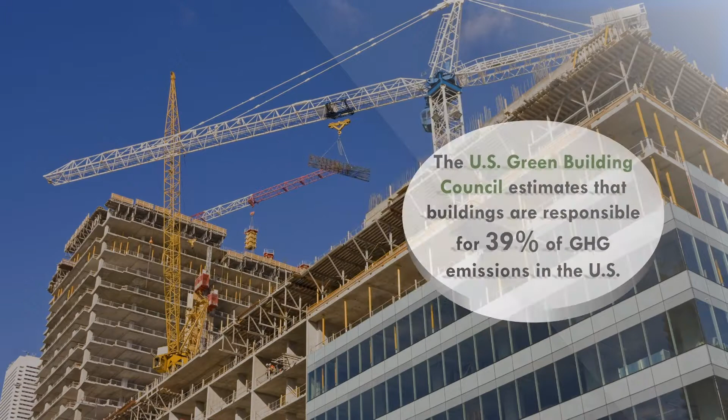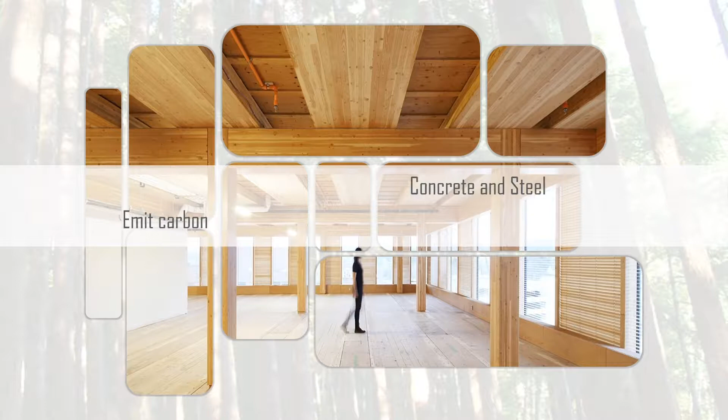Increasingly, wood-based building products are being promoted as green alternatives to concrete and steel. And the argument is that while concrete or steel create carbon emissions, wood products actually sequester atmospheric carbon. There's been quite an effort to market the newer engineered wood products on this basis. But what I'm going to highlight today is that the full carbon impacts of wood-based building products are not fully accounted for in most studies and in the industry literature promoting these products.

I'm going to start by laying out a few key messages for you here. First, it's a nearly universal assumption that timber is always harvested from a sustainably managed forest. But in reality, for a number of reasons, this is not always the case. At the point of harvest, when timber is removed from the forest, a significant amount of the already stored carbon is lost or emitted into the atmosphere. During the manufacturing process, again, there are significant emissions and losses of carbon. A lot of these emissions are not fully accounted for.

Then, in the built environment itself, this issue of material selection is actually just the tip of the iceberg. Greening the built environment requires a much broader lens than material substitution. The way the issue is often framed, that of wood versus concrete or concrete versus steel, is a bit of a misnomer, because in the final analysis it doesn't make a big impact on lifetime emissions. What does have a big impact are things like design, location, and longevity. The embodied carbon in these materials is only a small part of a much bigger picture.

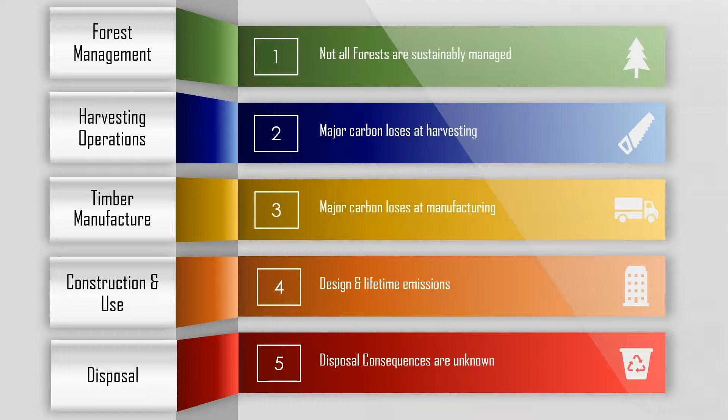And finally, the carbon emissions associated with the disposal and landfilling of wood products are very poorly understood. We don't have a good handle on what happens to the carbon in wood products when they end up in municipal landfills. There's a great deal of speculation in what is really a crucial stage for carbon accounting purposes.

I'm going to start by briefly covering the concept of carbon neutrality. Emissions from burning biomass or biofuels are called biogenic emissions. Now, carbon neutrality is the principle that when biomass is burned for energy, or the carbon from biomass is released into the atmosphere in some other way, these emissions are not counted towards the final carbon footprint of a product or process. The rationale behind this idea is that these emissions represent only the carbon that was initially absorbed by plants or trees while they were growing, and that these emissions will be fully reabsorbed by new growth later on. So this forms a hypothesis, the idea that biogenic emissions have a neutral climate impact.

But currently, biogenic emissions are 100% exempt from final emissions figures, for instance on environmental product declarations. And what this means is that regardless of how many emissions a product or process is responsible for, as long as they're biogenic in origin, they aren't a part of the official carbon footprint of the product. On paper, they don't exist. And this accounting standard gives wood products manufacturers an advantage in carbon accounting because a large portion of the emissions associated with the production of wood products are biogenic.

So carbon neutrality is in fact an accounting rule. It does not describe real-world emissions. Exempting biogenic emissions from the carbon footprint of a product on your balance sheet doesn't mean they don't exist. A carbon molecule from a biogenic source is identical to a carbon molecule from a fossil fuel source, and they have identical climate impacts.

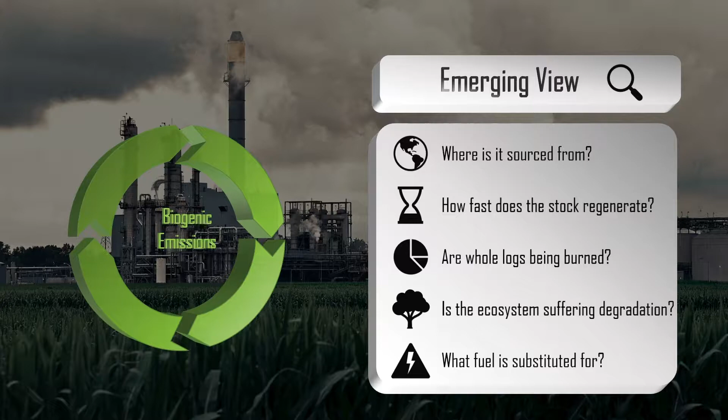This accounting framework also incentivizes the logging of forest land rather than the conservation of forest land, and this can be counterproductive. For instance, following the principle of carbon neutral accounting, there's no difference between leaving a healthy standing forest that sequesters a vast amount of carbon to mature or clear-cutting that forest and burning the wood for energy. On paper, these have identical carbon consequences, zero net emissions.

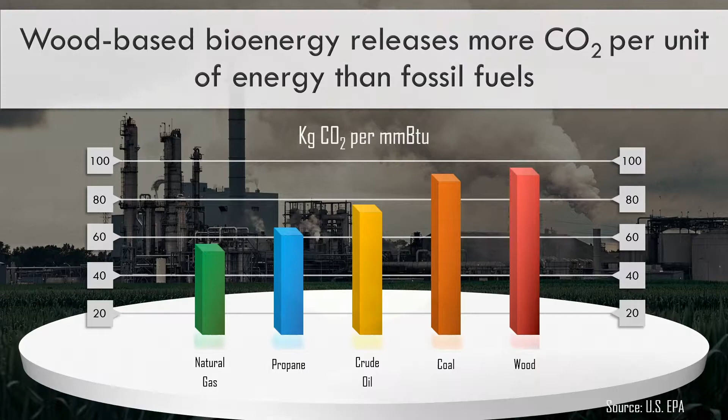Now, another concern that researchers have with the concept of carbon neutrality is that wood-based biofuels are just not very efficient. While there are differences between types of wood-based fuel or type of coal, for instance, in most cases, per unit of energy produced, burning wood or wood pellets actually emits more greenhouse gas emissions than any source of conventional fossil fuels. So there's a growing alarm that declaring all wood-based bioenergy to be carbon neutral will actually increase emissions in the air while decreasing them only on paper, because you need to burn a lot more wood to produce a small amount of energy.

Now I'm going to break down the life cycle of wood-based building products into 5 distinct stages. The first one is forest management. Second is the point of harvest or logging operations. The third is timber manufacture, where harvested roundwood is converted to various forest-based products. And the fourth is the construction and use phase. This is where we're going to discuss the role of wood in the built environment itself. And finally, disposal, or end of life.

So our story is going to begin in the woods. Forests are some of the Earth's most valuable carbon sinks. They're sometimes described as the lungs of our planet. Now, it's almost always assumed that lumber is being harvested from a sustainably managed forest. But unfortunately, from a carbon management perspective, not all forests are sustainably managed. In fact, what constitutes a sustainably managed forest is subject to much debate.

The old-growth forests of the Pacific Northwest are some of the most productive carbon sinks anywhere on the planet. They can be thought of as vast reserves of carbon capital. And once this carbon is emitted or spent, it's gone. We typically think about wood as a renewable resource because, of course, trees grow back, but these old-growth forests are not a renewable resource by any definition. If you want to renew the carbon stock of a harvested 200-year-old tree, you need to wait 200 years.

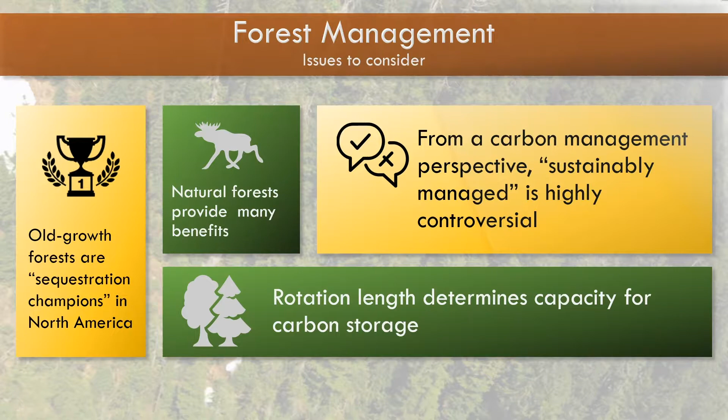Now, one of the premises of sequestering carbon in wood-based building products is that from a climate perspective, mature trees are less valuable than younger trees. It's argued that they don't grow as fast or absorb carbon at as high a rate, but there's just not good evidence that this viewpoint is viable. Although the rate of growth will decline after a certain age, the absolute quantity of carbon uptake often continues to increase, and this is because a smaller percent in growth in a massive tree adds a lot more biomass than a large rate of growth in a small tree. And so even very mature stands, well over 100 years old, continue to act as net sinks of carbon.

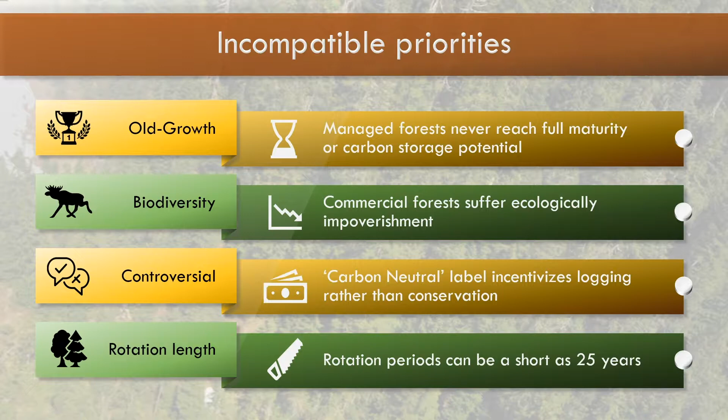In the Pacific Northwest, rotation periods, which are the years between harvests, can sometimes be as short as 25 or 30 years. And while this can be highly economical, it has minimal value from a carbon management perspective. So unfortunately, there's a disconnect between rotation lengths that are good for carbon management and rotation lengths that are economically preferred. Now we're going to talk about some of the effects of logging on forest carbon.

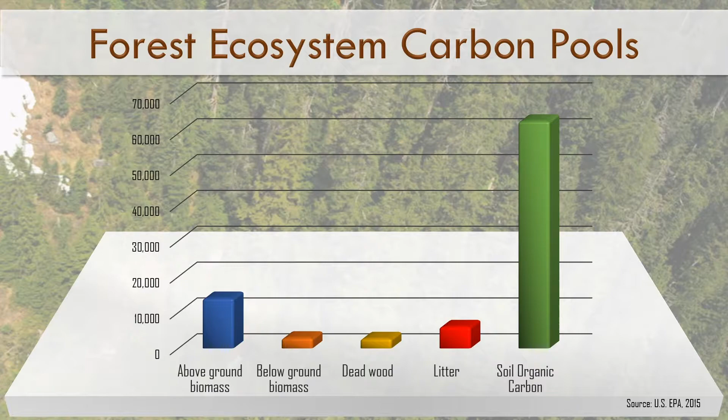Most of the studies on carbon sequestration in wood products omit the disruptive effects of logging on the soil carbon pool, which, as we saw, is the largest pool in the forest, despite current evidence that harvesting reduces the level of carbon in the soil. These are effectively emissions from the soil to the atmosphere.

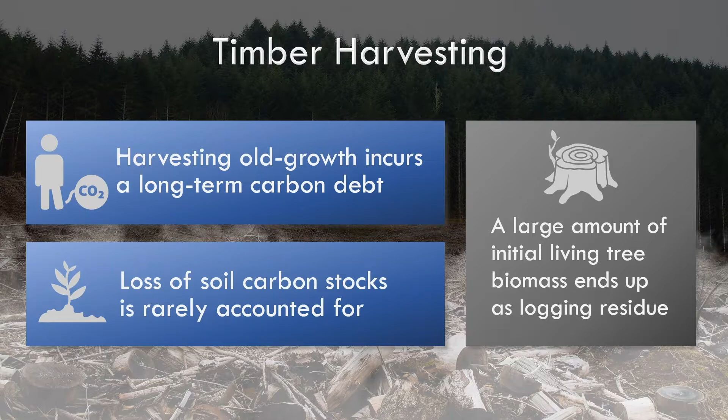During a harvest, only a portion of each tree is removed from the forest for processing. A significant portion of the biomass in the initial living tree is not merchantable. It has no economic value, and it's either left in the forest to decompose or is burned. These emissions also typically go unaccounted for.

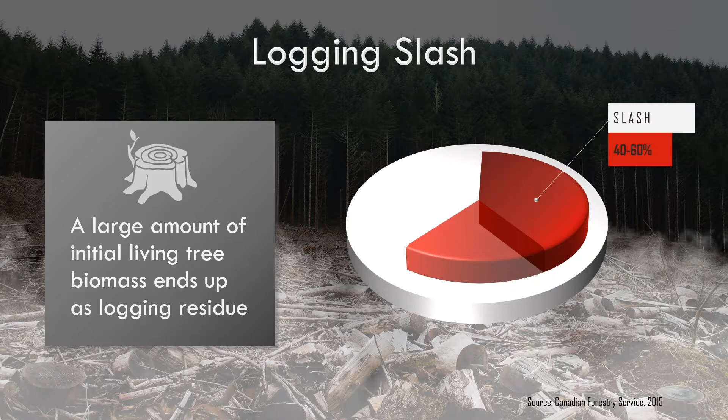And even after 100 years of regrowth, the secondary forest still only stores a little more than half of the carbon that was once sequestered by the primary forest. Now, current forest management practices mean that reforested acreage in commercial plantations will never reach the level of carbon sequestration attained by old-growth or primary forests.

So taking this into account, a complete review of the carbon data that includes these terrestrial impacts can show that there's actually a carbon debt in existing wood products and structures. While living trees sequester carbon, wood products are the result of an industrial process that emits carbon. And these emissions occur at each of the 5 stages that we identified earlier.

First, emissions from collateral damage to other carbon pools in the forest ecosystem during harvesting. Emissions during the manufacturing process, losses during the construction process, as well as maintenance and replacement costs during the use phase. And at end of life, when they're eventually disposed of. We're going to look at emissions during the manufacturing stage now.

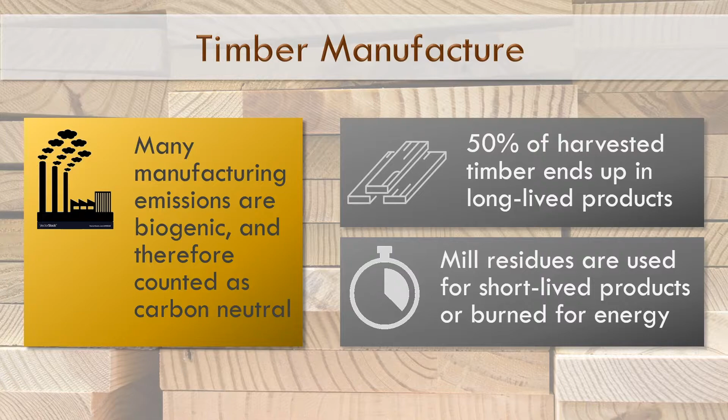At the primary manufacturing stage, only about 40 to 50% of large roundwood logs are converted to lumber. The remainder, called mill residues, are burned for energy to power the mill or sold to pulp and paper plants for use in products with little to no long-term carbon storage value. These emissions from wood waste and wood fuel are of course deemed carbon neutral and omitted from the final emissions footprint of the mill's operations.

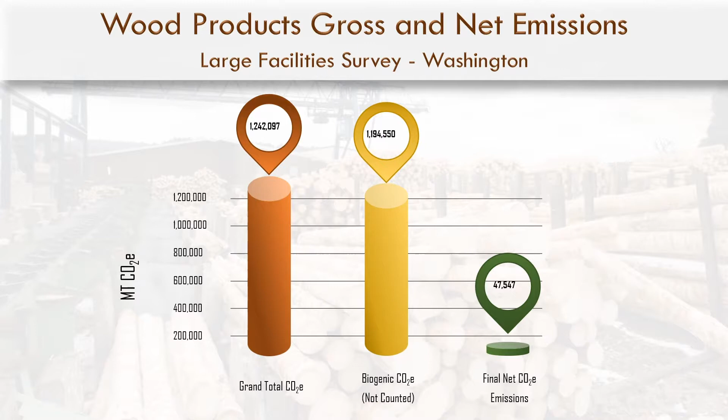Here's an example of the carbon neutral emissions from large facilities emitters in Washington. This chart breaks down emissions between fossil fuel and biogenic sources. As you can see, virtually all of the emissions, about 96% of them from Washington mills, come from burning wood-based fuel.

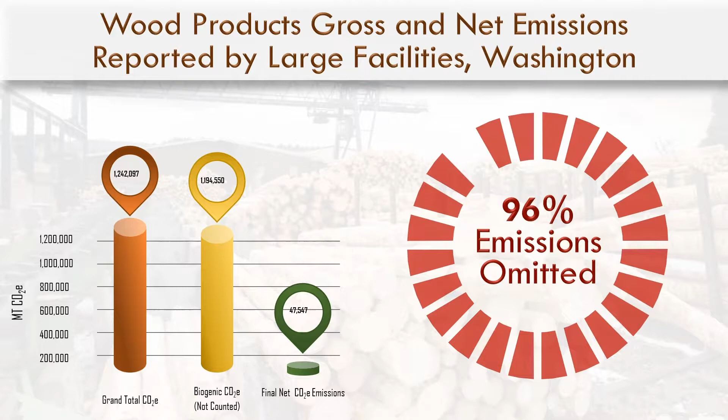Well over 1 million metric tons of greenhouse gas emissions get written off of these carbon balance sheets. These emissions that are omitted from final figures are equivalent to burning nearly 1.3 billion pounds of coal based on the EPA's greenhouse gas equivalency calculator.

And while new growth may eventually reabsorb some or even most of these emissions, the process will take decades or even a century or more. In the interim, the greenhouse effect of these emissions are every bit as real as those from fossil fuels.

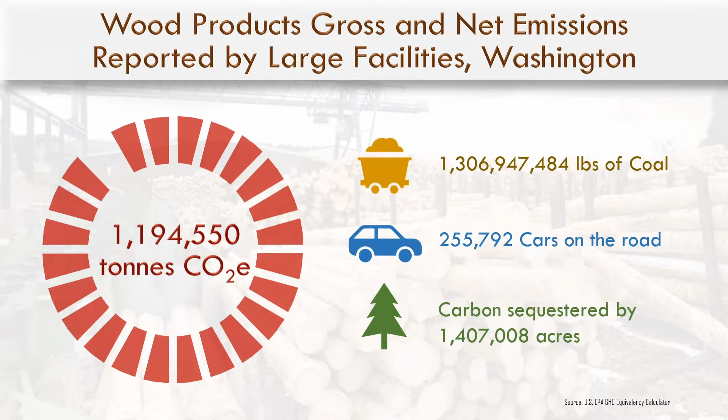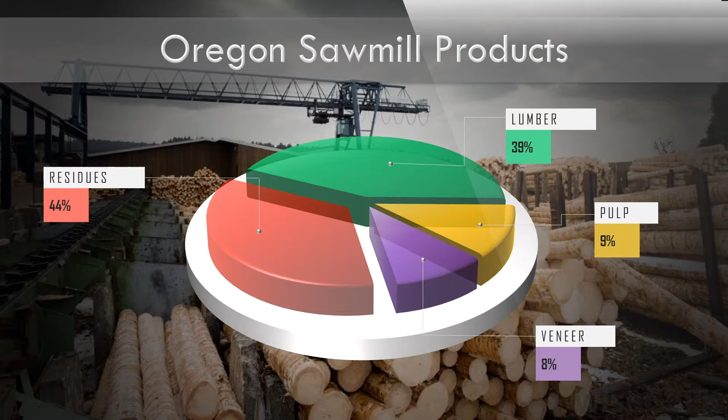And these residues are typically either burned for energy or sold to pulp and paper plants for the manufacture of other short-lived products. Now, while there are serious efforts underway to grow the market for mill residues, the options don't allow for much long-term carbon storage.

So now that we have a more complete picture of the emissions and carbon costs associated with the sourcing and manufacturing of wood products, we're going to talk about the role that a given material plays in the overall carbon footprint of the built environment.

The reality is that the carbon footprint of the built environment goes well beyond carbon accounting for specific building materials. The energy and emissions associated with all the processes and materials from their sourcing to the completed construction of a building are called the initial embodied energy of a building. And initial embodied energy accounts for somewhere between 10 and 20% of a building's lifetime emissions.

So when we're talking about substituting one material for another, we're really only talking about an attempt to address 10 to 20% of the issue. This is only the tip of the iceberg. Discussions of carbon sequestration often frame the issue as one between hypothetical wood buildings and concrete or steel buildings. But in the real world, there are practically no such structures, those built exclusively out of one material type, that is. All buildings are constructed with a mix of materials.

A single building may contain 60 different basic materials and over 2,000 different components. Each of these have their own embodied energy, costs, and longevity. In reality, all building materials are indispensable. If we're going to get serious about reducing the carbon footprint of the built environment, our attention and resources are much better spent on building better buildings.

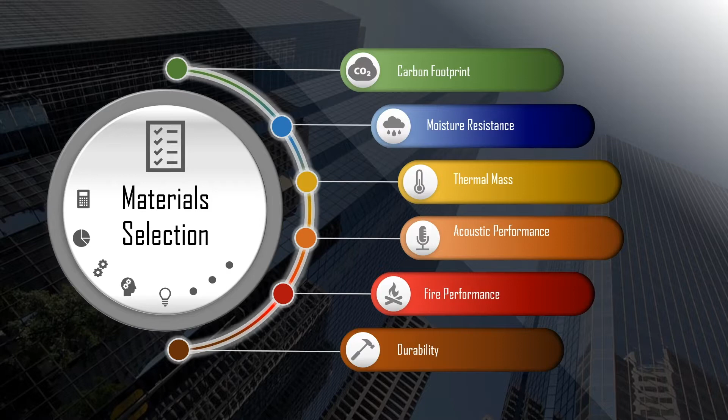Because there are all these attributes to consider, each material has unique benefits and unique drawbacks, and design decisions therefore always involve a series of complex trade-offs. The initial carbon footprint of a given material is only one factor that needs to be considered in this process. And just as choosing the least expensive material is not necessarily the best option for a particular component, neither is simply choosing the material with the assumed lowest initial embodied energy.

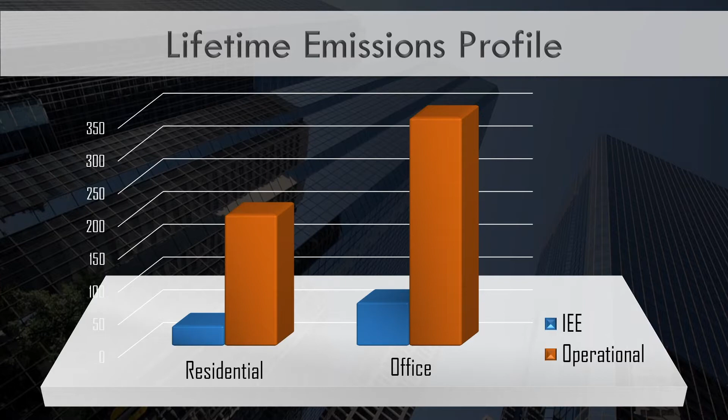While the initial embodied energy of a building accounts for 10 to 20% of lifetime emissions, operating emissions, the energy needed to heat, cool, and power the building, account for 80 to 90% of lifetime emissions. In a full life cycle assessment, from the sourcing of raw materials to the decommissioning of a structure, the differences between material types in terms of lifetime emissions are marginal. It's a small part of a much bigger picture.

The factors that primarily influence the lifetime emissions of a building are design, which in part determines the operating efficiency of the structure, location, orientation, the electricity source for the building, the climate, which dictates heating and cooling needs, the cumulative repair and maintenance required on your components, and the longevity of the building and its structure. Over the service life of a building, the emissions associated with the maintenance and repair of building components can actually exceed the emissions from their initial embodied energy.

A highly effective way to reduce the contribution of initial embodied energy to lifetime emissions is to ensure the longevity of the structure. Building for resilience is important, and this is part of the bigger picture that I'm emphasizing, that of building better buildings.

The last stage in the wood product's life cycle is disposal, and there are a variety of disposal options for wood products. The most beneficial from a climate perspective is recycling or reuse. Wood products can also be burned as a waste disposal option, sometimes to generate energy. And the third option is burial in a landfill. Currently, far too much wood waste ends up in a municipal landfill, and from a carbon accounting perspective, this is highly problematic.

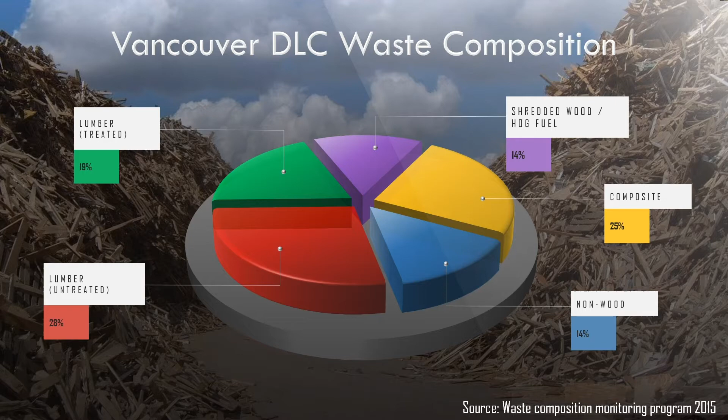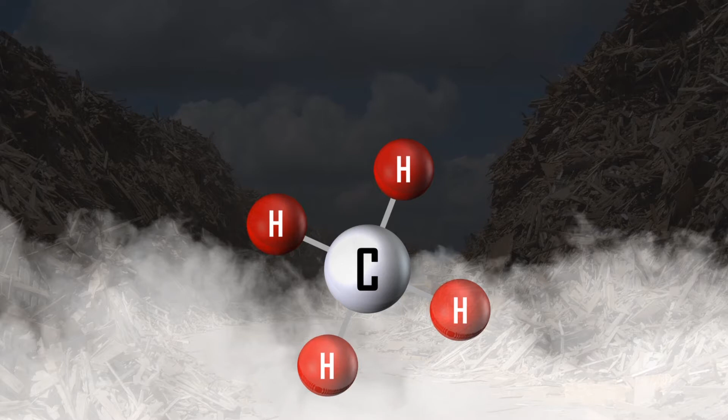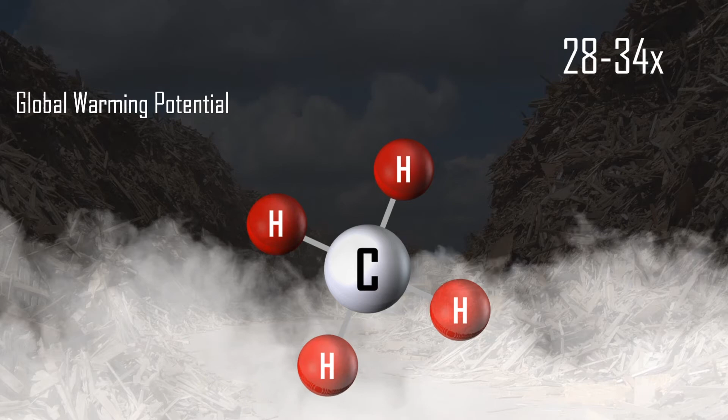Under anaerobic conditions, wood and other organics are subject to decomposition by methane-producing bacteria. In this process, the carbon is converted to approximately equal parts carbon dioxide and methane gas. Methane has a 100-year global warming potential of 28 to 34 times that of CO2. And rising methane emissions from solid waste disposal sites are a serious and growing global problem.

Now, the concern with wood products in landfills is that we don't really know how much methane they're going to ultimately produce. For instance, how much of the carbon in the wood is eventually converted to carbon dioxide and methane. And secondly, how much of this methane actually escapes the landfill? How much is recoverable with capture and flaring systems? As it stands, there are some laboratory models that estimate methane emissions from wood products, but the differences in these estimates based on the different models range tremendously, by well over an order of magnitude.

Now, one thing to consider is that because of the damp and wet climate conditions in the Pacific Northwest, wood products can be expected to decay more rapidly. This means that results from studies conducted under different or drier conditions may not necessarily apply here. When it comes to the final fate of wood products in landfills and their ultimate carbon footprint, we just don't know enough to draw firm conclusions.

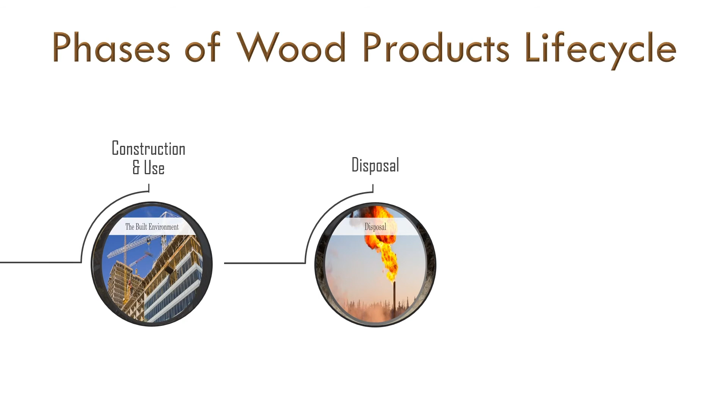So in closing, this flowchart is going to help us follow the carbon through the wood product's life cycle and summarize the key takeaways. At each step in the process, wood products are responsible for emissions even if they're not always accounted for. So in the final analysis, a number of researchers have tracked the flow of carbon from forest to finished product. And studies show that about 15 to 30% of the carbon that was once stored in the living tree ends up in a long-lived building product. So the transfer of carbon from the forest ecosystem to the built environment is just not very efficient.

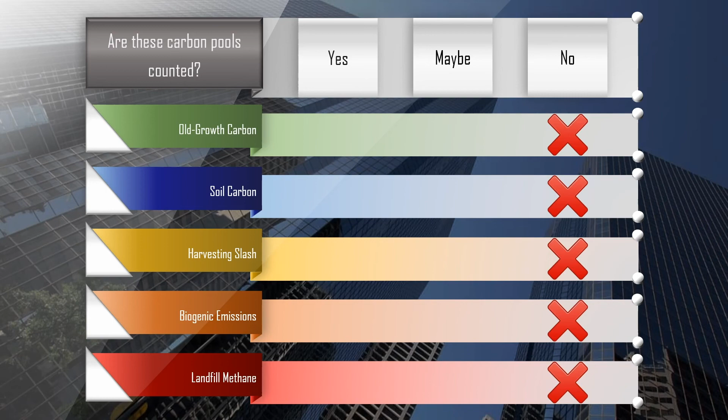This process causes carbon emissions from a number of other carbon pools that are not always accounted for. For instance, the irreversible loss of old-growth carbon capital, carbon emissions from soil pools caused by logging, the potential rise in real emissions from the use of wood-based biofuels, and the vast uncertainty in final methane emissions from these products in landfills.

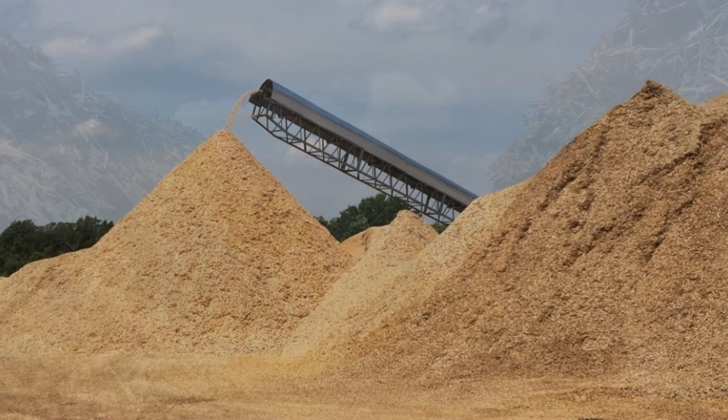At the end of the day, what we can safely say when we talk about carbon sequestration is that living trees sequester carbon, and wood-based building products are the result of an industrial process that emit carbon. A more realistic and comprehensive approach to greening the built environment is one that's less concerned with material substitution, and rather one that emphasizes building more resilient and more energy-efficient buildings.